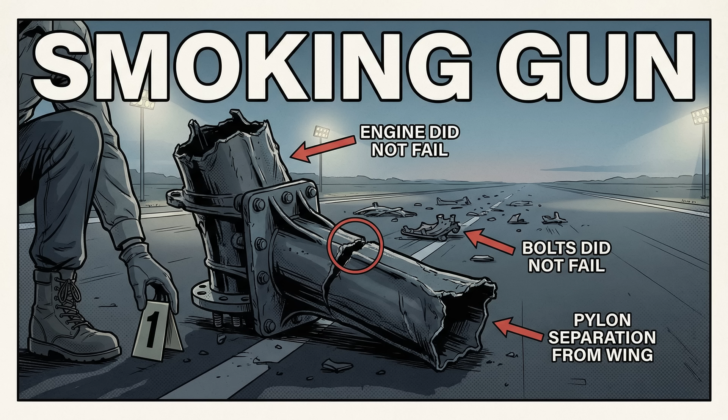When the NTSB arrives, the debris field stretches for half a mile. But the most important piece of evidence isn't in the wreckage. It's sitting on runway 17 right. This is the smoking gun.

The engine didn't fail. The bolts holding the engine to the pylon didn't fail. The pylon itself separated from the wing. This massive metal arm, designed to hold 60,000 pounds of thrust through hurricanes and hard landings, simply let go.

Here is where it gets scary. These attachment points are designed with a calculated weakness. They are meant to shear off in a violent crash to save the wing, but they should never, ever let go during a routine takeoff. For one to snap during a normal roll implies a catastrophic structural failure that should be impossible in modern aviation, unless history is repeating itself.

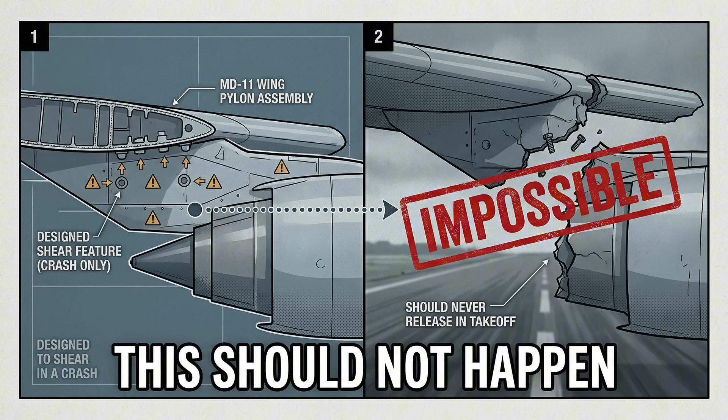To understand why this happened in 2025, we have to go back to 1979. Chicago. An American Airlines DC-10 rotates. The left engine pylon snaps. The engine flips over the wing, severing hydraulic lines. The plane rolls 90 degrees and crashes, killing 273 people.

The MD-11 is the direct descendant of the DC-10. After 1979, the industry swore they fixed the engine separation issue. They redesigned the pylons. They changed the maintenance procedures. For 40 years, we thought the nightmare was dead. But the design philosophy, the way the heavy engine hangs off the wing, remained similar.

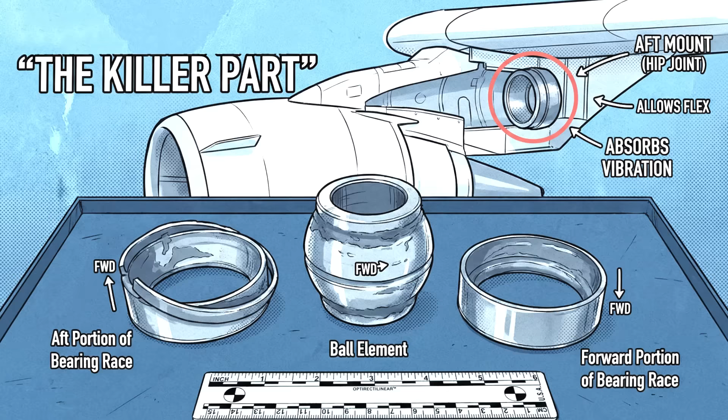The pylon is attached to the wing at specific points. The most critical is the aft mount. This is the hip joint of the assembly. It takes the brunt of the thrust loads. And just like in 1979, if this joint fails, the engine has nowhere to go but off.

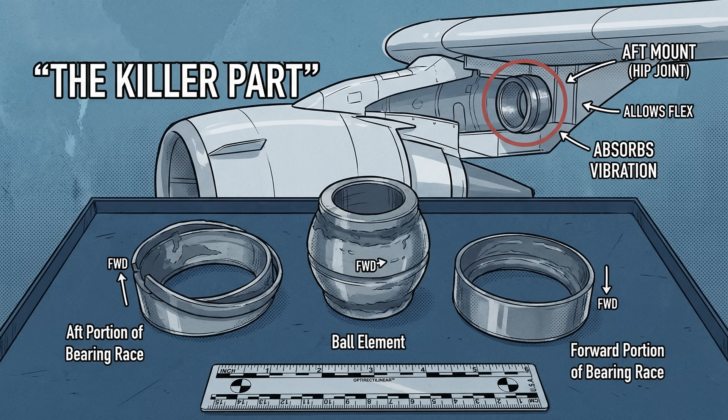So let's look at the killer. It is called the spherical bearing. It lives inside the aft mount bulkhead. It allows the pylon to flex slightly, absorbing the vibrations of the engine so the wing spar doesn't have to. The bearing consists of a ball inside a race.

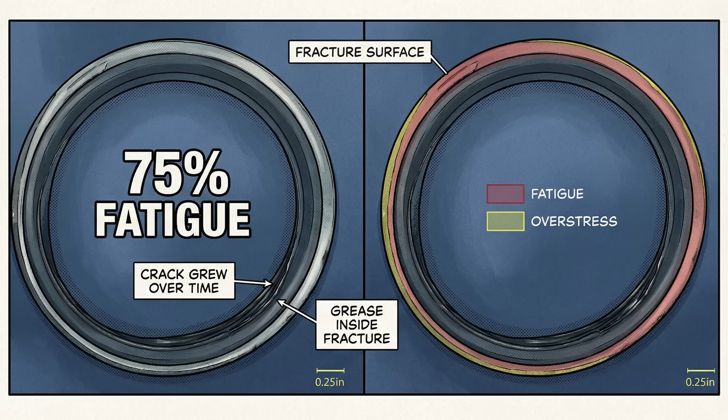The NTSB metallurgical report is damning. The race, the hardened steel outer shell, was found fractured, but it didn't snap all at once. The report confirms 75% of the fracture surface showed signs of fatigue. Fatigue means time. This crack started months ago, maybe years. Every takeoff, every landing, the crack grew a microscopic amount. By the time Flight 2976 lined up on the runway, that bearing was holding on by a thread.

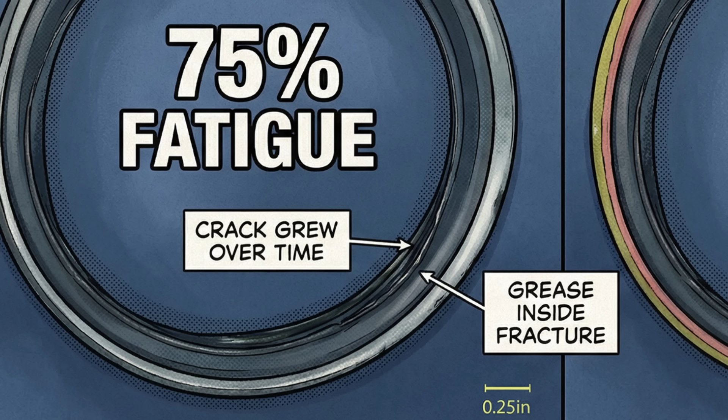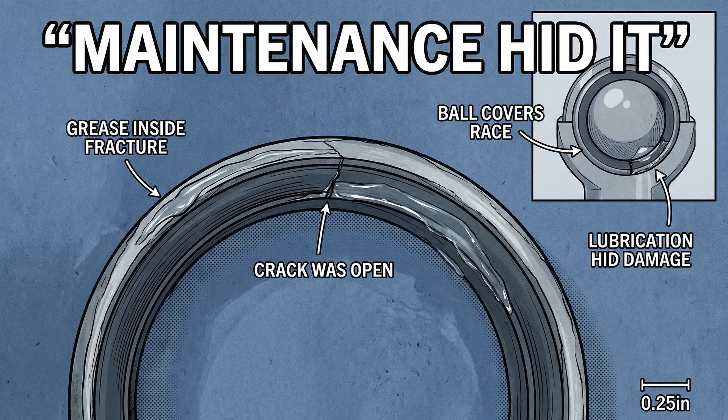But wait, if it was cracked for months, why didn't anyone see it? The plane had just come out of maintenance in San Antonio, and this is where the grease comes in. The NTSB found grease inside the crack. That implies the crack was open and exposed when a mechanic applied lubrication. But because the spherical bearing is buried deep inside the mount, and because the ball covers the race, you can lubricate it without ever seeing the fracture. The very maintenance designed to save the part hid the failure.

On November 8th, UPS didn't wait for the FAA. They grounded their fleet. On November 9th, the FAA issued the Emergency Airworthiness Directive. Every MD-11 grounded, then the DC-10s, then the tankers. But here is the detail that will fuel the lawsuits for the next decade.

Reports indicate that as far back as 2011, Boeing had issued bulletins regarding the wear patterns on these specific mounts. They knew vibration could cause premature failure. They recommended inspections. But recommendations are not regulations. Did the industry normalize the deviance? Did we see wear so often that we stopped treating it as a crack? That is what the NTSB is trying to answer.

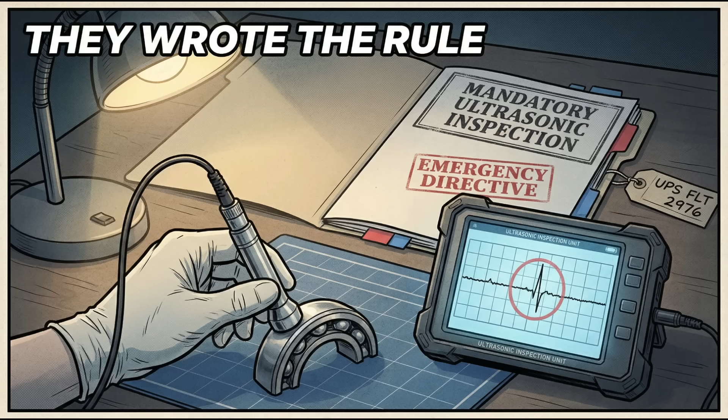The regulation that now mandates ultrasonic inspections for these bearings? That was written by the crew of Flight 2976. They were fighting a battle they couldn't win. At 175 feet, with the center engine failing and the lift destroyed, physics had already decided the outcome. The question isn't why the metal failed. Metal always fails eventually. The question is, why were we flying on it until it broke?